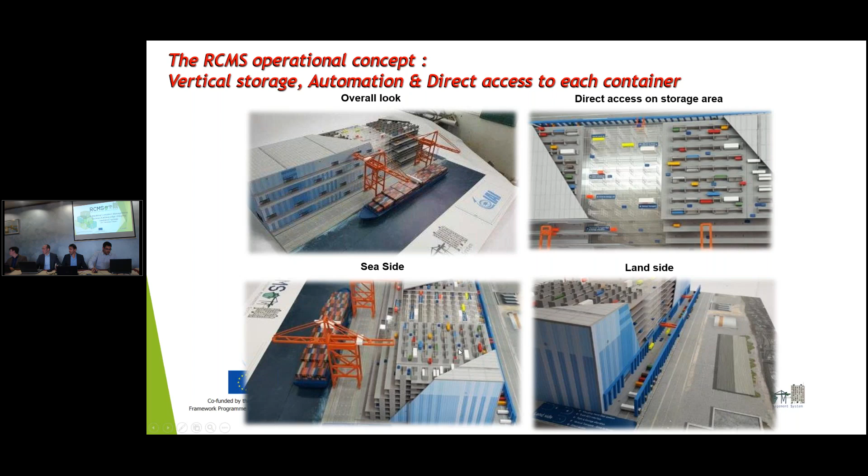From the top view, you can see the general layout, which we will dive into in more detail later on. We differentiate between the sea side on the left and the land side on the right, and in the middle there is the storage. So we have three main elements, and we'll now dive into more details on each one: the interface with the sea, the storage inside the infrastructure, and the interface with the land side.

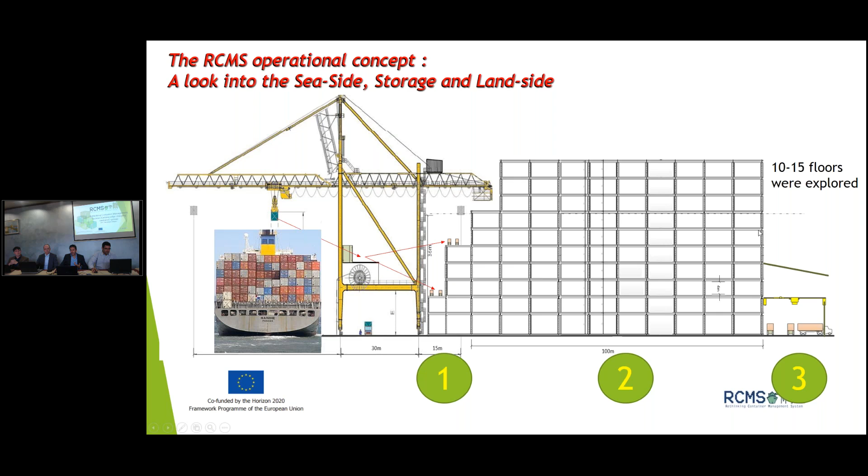This sketch is already after some design by our partner Sellhorn, who will get into more details during his presentation. So the first part is the interface with the sea side.

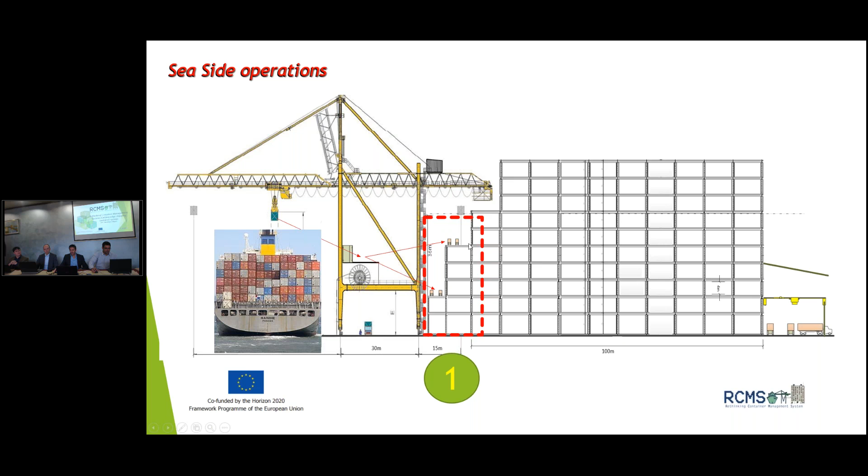That's where we release the twist locks before we put the containers on the balconies, which are outreaching from the building. We have a few balconies, you can see here.

The AGV, which was designed during the project by us, is a unique AGV with omnidirectional capability.

The AGVs are controlled by central software which manages all of the resources in the building, getting its missions and knowing exactly to which balcony to drive and under which STS crane to wait. Under the crane, we have a circular queue in order to maintain the right order when uploading containers into the ship. When downloading containers, it doesn't really matter which AGV arrives first.

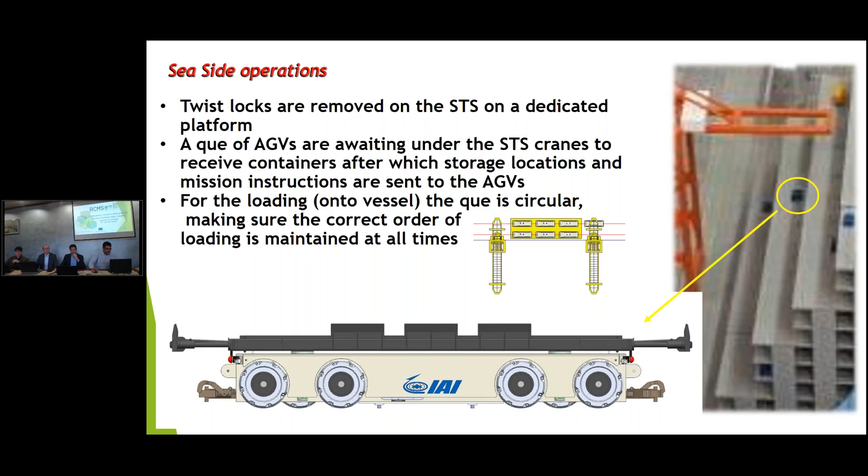We'll get into more details about the AGV later on as part of the discussion of the storage. This is the next element.

The storage provides—we'll see some key performance from HPC later on—but in general, we are able to have many more containers per hectare than any other current technology. We can have storage 10 floors high, 12, 15. It's very site dependent and according to the requirements of the specific terminal.

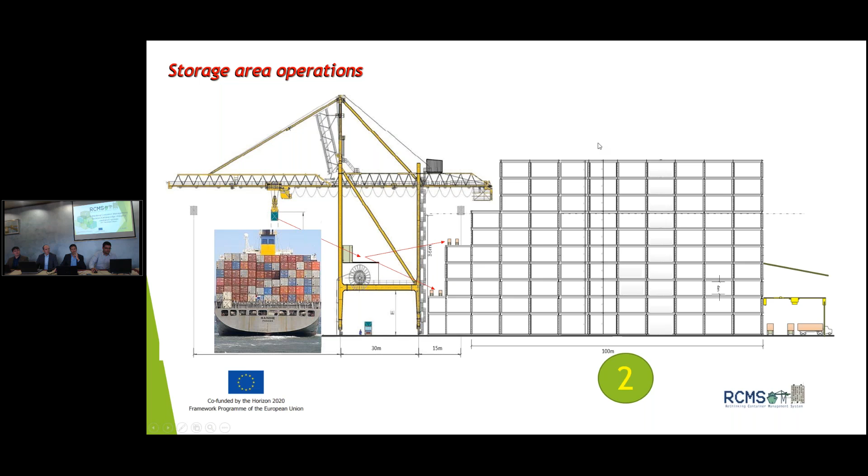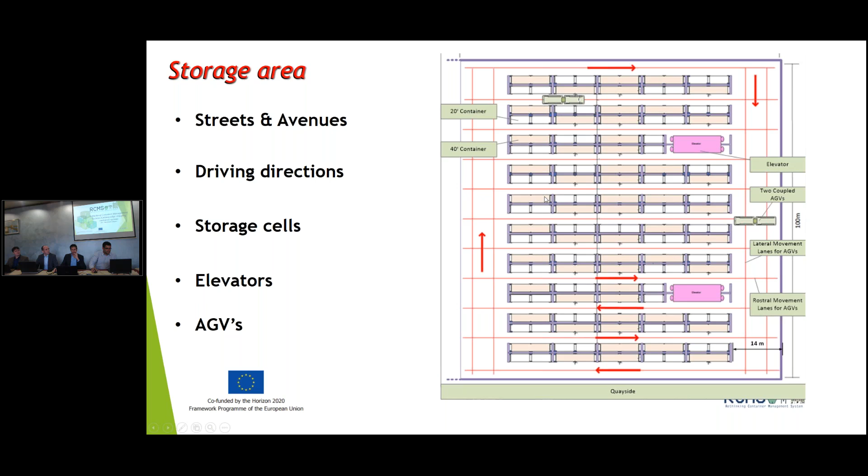Inside the storage, this is the top view of a typical floor. We have streets driving from side to side in parallel to the quay, and avenues driving perpendicular to the quay, between the sea side and the land side. Driving direction, storage cells—those are the storage cells. We have elevators and AGVs.

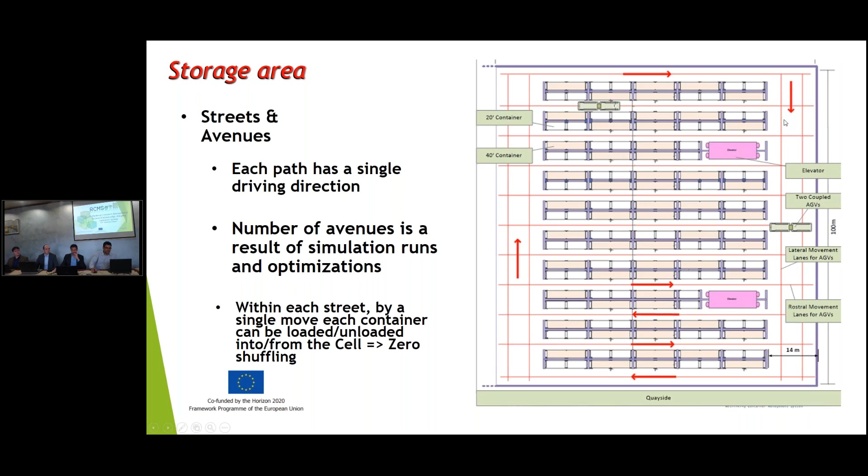In each avenue and each street, for robustness, we have a single direction in which any of the AGVs can drive. This makes it very robust operationally, and the number of avenues, how many free lanes we have, is an output of the simulation run by HPC. That dictates the density of the entire building.

The storage cell is very unique—this is the storage cell. In each storage cell, we can store either two 20-foot containers or a single 40-foot container. The containers are stored like floating in the air, enabling the unique AGV to get under the container and fetch it in one step.

This enables us to have zero shuffling, because while driving in the street, with a single move we get into the cell and fetch a container. So this is actually zero shuffling.

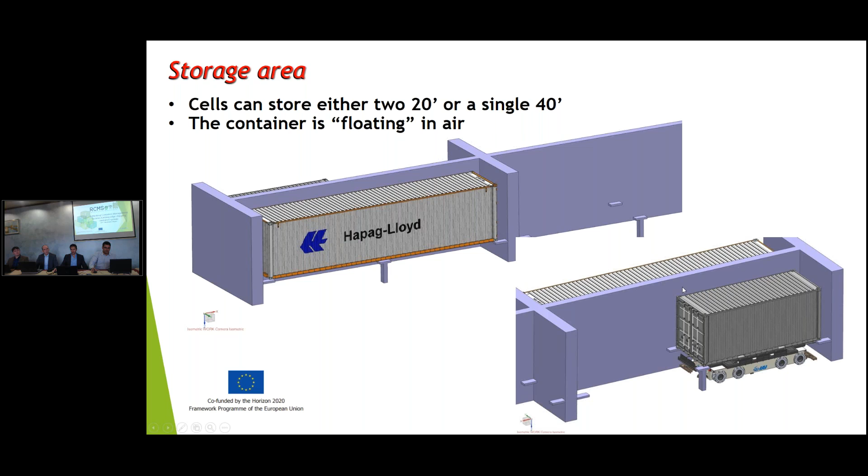The next item is the AGVs. Those are two AGVs being coupled together—it looks like that. We have a coupling mechanism, and it doesn't matter from which direction the other AGV is arriving. It can be coupled from either direction or from any side of the AGV.

The AGV has a lifting platform, and on top of the lifting platform, the container is dropped under the STS crane or picked up while taking it from the cell. We have a very good design which enables us to work 8 hours continuously with only 2 hours of charging. It is a completely electric vehicle.

It is smaller than a container, and using the special omni wheels, we can drive in any direction, which is very important to enable us to work in the specific layout you saw before—there is zero radius needed for maneuverability, unlike today's vehicles.

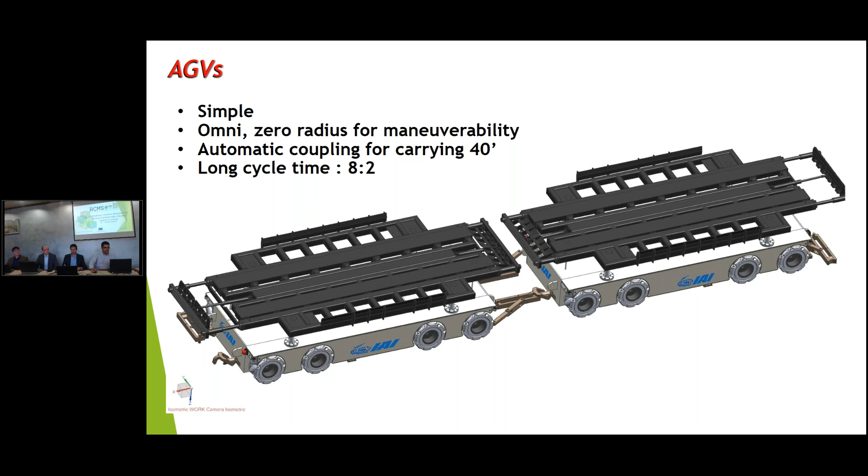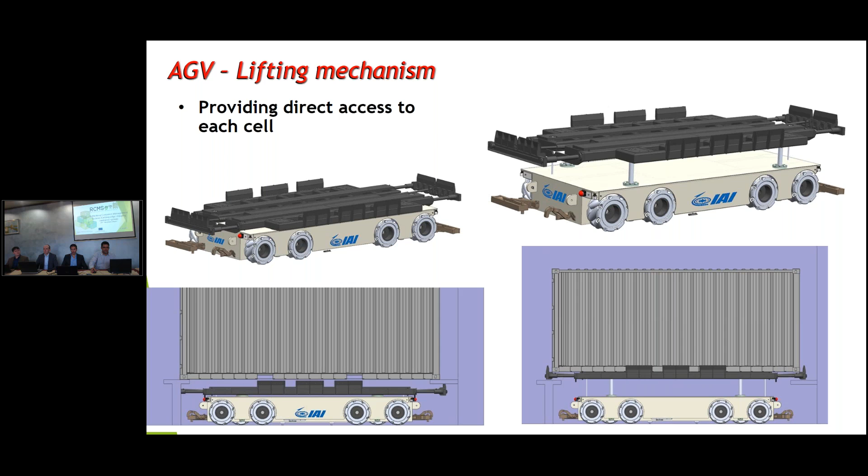How it works: this is the AGV inside the cell. Currently, the lifting platform is in the lower position, and then it is raised upwards, as you see here. While getting upright, it is actually taking the container, and then the AGV can get out of the cell and drive to the STS or to the waiting trucks on the bottom floor.

Comparing with today's traditional AGVs, our AGV is much more compact, of course lower cost because of that, and lighter in weight. Also, for horizontal transport, it has its benefits because of the zero-radius maneuverability—we can have horizontal transport over a much shorter distance, with the width much smaller than today's horizontal transport areas where AGVs are used.

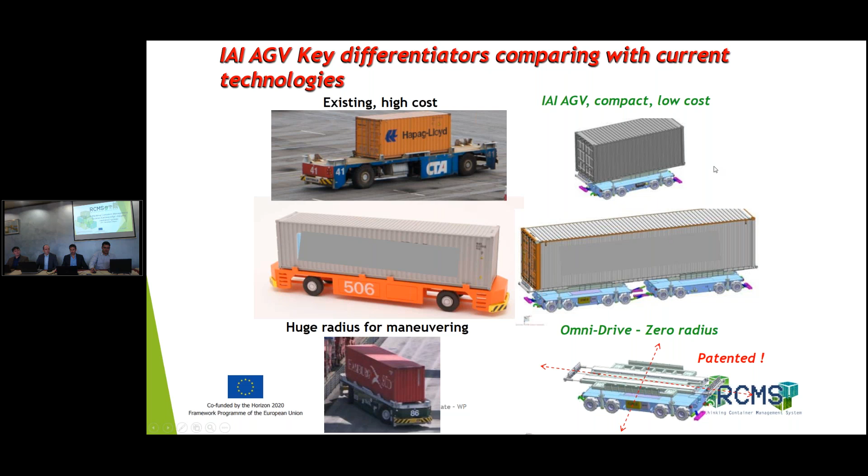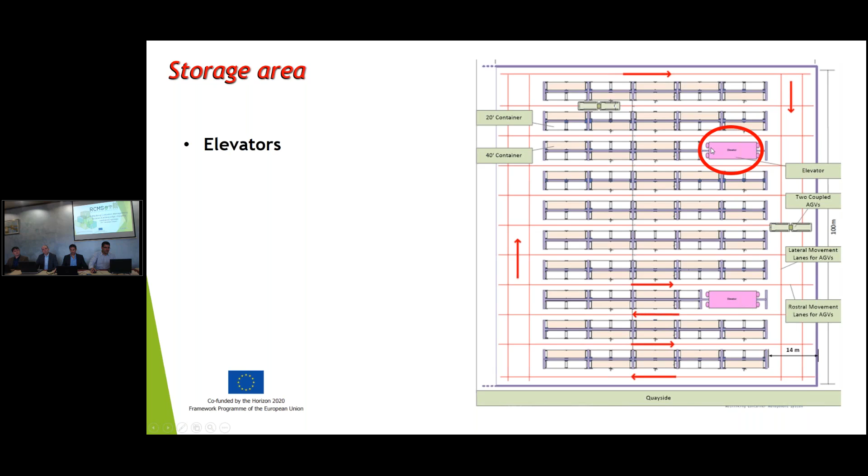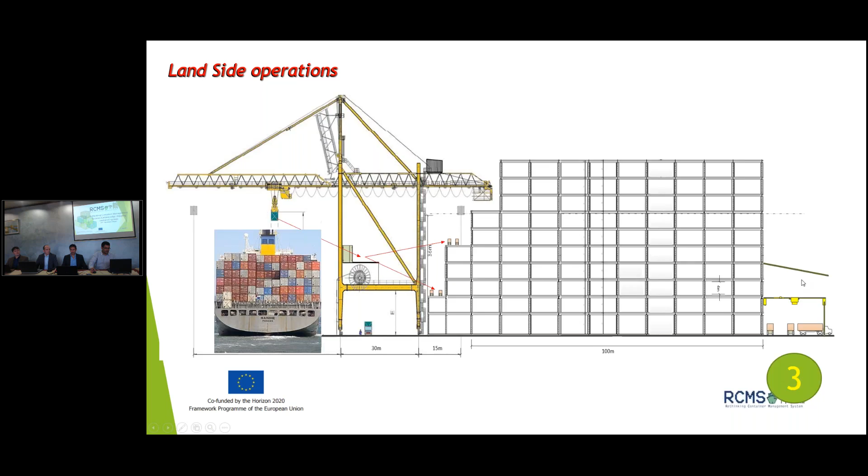The simulation optimized the working of each OHBC, overhead bridge crane. The AGV gets out of the building, goes to the right place, to the right slot, and the OHBC takes the container to or from the truck and from the AGV. Then the AGV continues its mission, storing the container inside the building using the elevators to move between floors.

So what we saw here in brief is a top view and an overview of the operational concept of the RCMS, with discussion on three main areas: the interface with the sea side, the storage with the unique AGVs we developed, which is very unique for this project, and the interface with the land side.

The project provides space utilization much better than any current technology. It is modular, meaning you can build the building in steps — you don't need to build the entire infrastructure along the entire quay from day one — and it's very robust against potential errors. Right now, Israel Aerospace Industries is looking for places and partners to start working on a pilot.

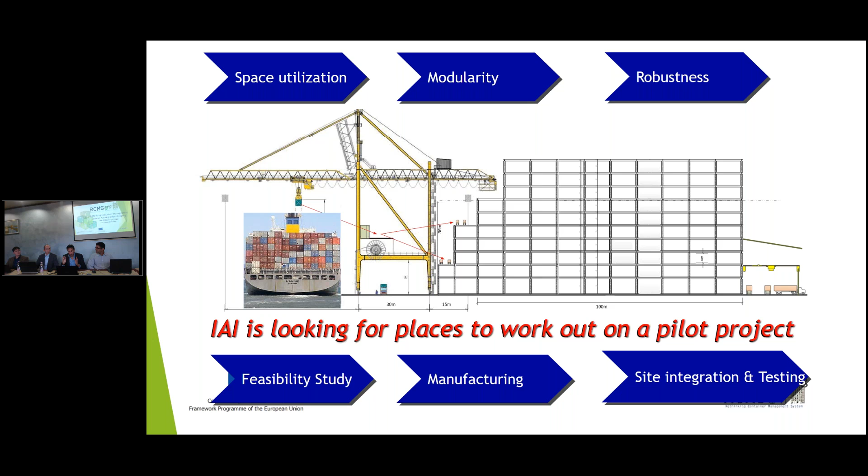Actually, we don't have any questions, but they may come. So thanks Anand for the presentation and for the time. Now the floor is for Niels. Niels came from HPC Hamburg Port Consulting. The presentation from Niels will be about one of the main aims of the project I was mentioning before, comparing and assessing the performance of RCMS with other state-of-the-art technologies in handling containers in terminals. So Niels, the floor is yours.

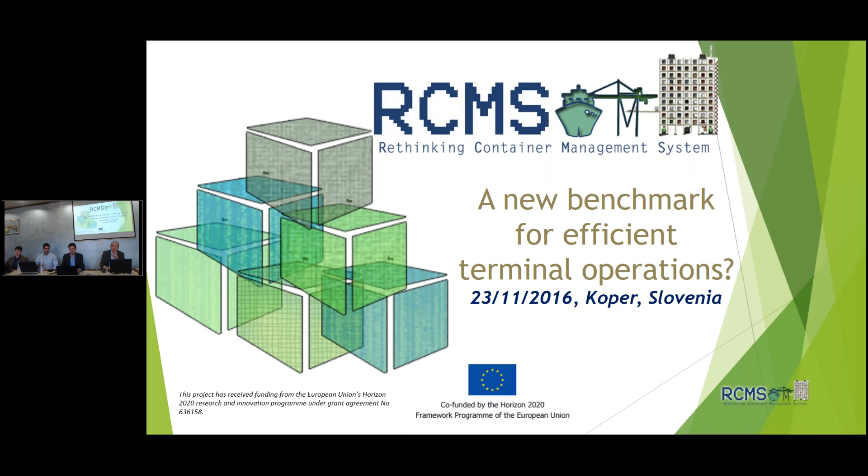Thank you, Alexio, for the introduction. As you said, following the technological introduction of the system, presenting its functionality and basic concept, I would like to address the question of whether the RCMS system as planned is actually feasible, and whether it can achieve better performance than existing systems. So the question is: is it a new benchmark for efficient terminal operations?

In principle, the RCMS, as presented by Hanan, sounds like a very interesting solution. It offers improved stacking density and area utilization, as he highlighted. It does not require unproductive container rehandling — shuffle moves or housekeeping moves — which are usually required whenever you stack containers. It also enables full automation of the system, and shall enable competitive productivity and service levels for landside and waterside operations. It will also reduce emissions — not just exhaust emissions as Hanan mentioned, but also light and noise emissions, since operations mostly take place within a building — and at the same time improve work safety.

But the question we will address in this presentation is: does it actually work as planned? Which productivity levels, which area savings can we achieve, how much additional throughput, and ultimately how much equipment is required to achieve these gains in storage density? So ultimately, the question is whether the RCMS is better than state-of-the-art systems.

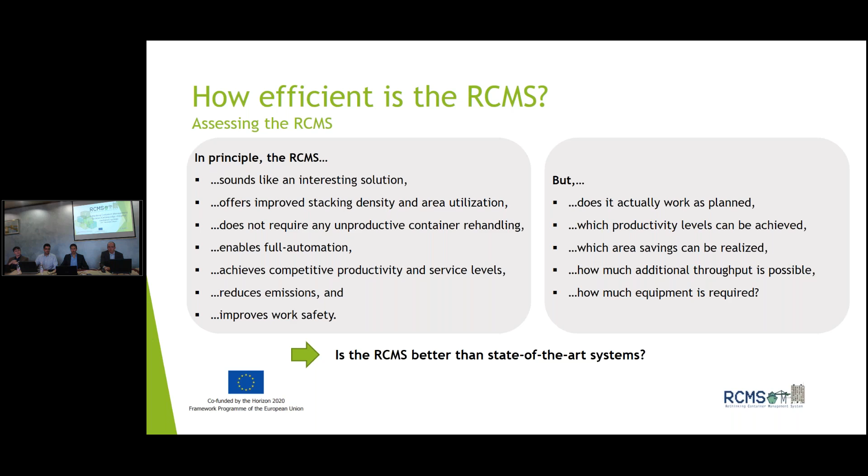This brings me to two important questions. First, what does a better system actually mean? There are several ways to assess container terminal and container handling technology — you can evaluate them on several criteria and dimensions. Noteworthy are costs, investment costs, operating costs, and environmental considerations like noise and exhaust emissions. But most important of all, the baseline for any system, is operational performance. And for operational performance too, there are several different criteria that have to be taken into account.

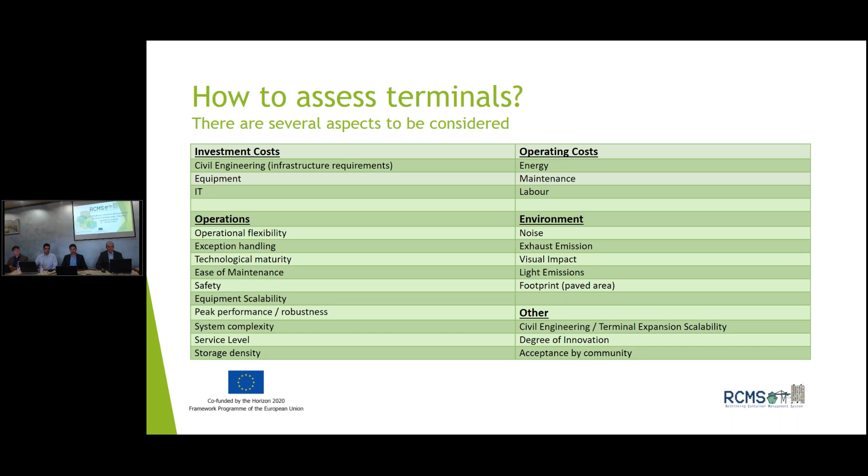From our experience at HPC, I think the most noteworthy metrics are the service level and the storage density. The service level is the productivity that can be realized at the water side when working on the vessel, and at the land side when serving trucks and trains. Storage density refers to the throughput that can be achieved per area on the terminal.

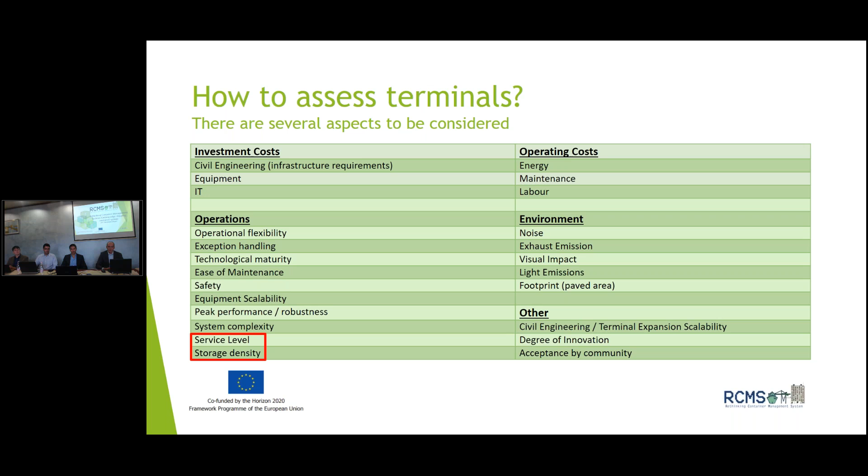The other question is, what are the competitor systems with which we have to compete and outperform in some aspects? For me, the state-of-the-art systems are, on one hand, the conventional RTG system, meaning fully manual rubber-tired gantry cranes, which is the most common system on relevantly sized terminals around the world. The other state-of-the-art system is the ASC AGV system, which is also proven and in operation at several terminals around the world, and is fully automated.

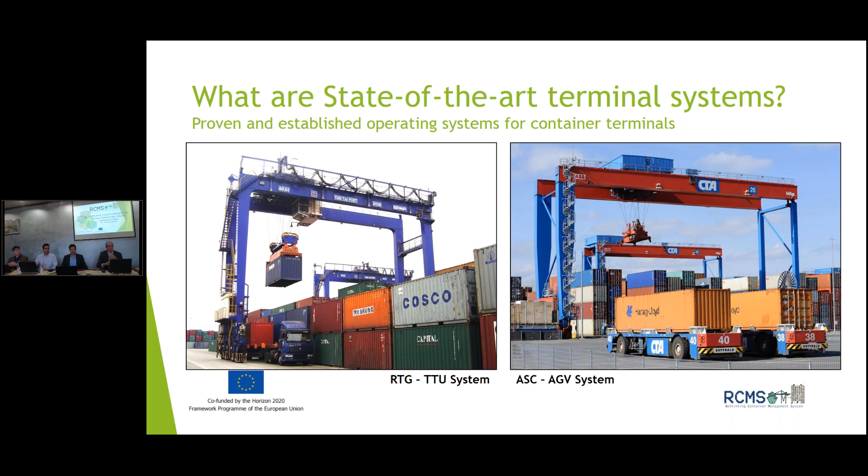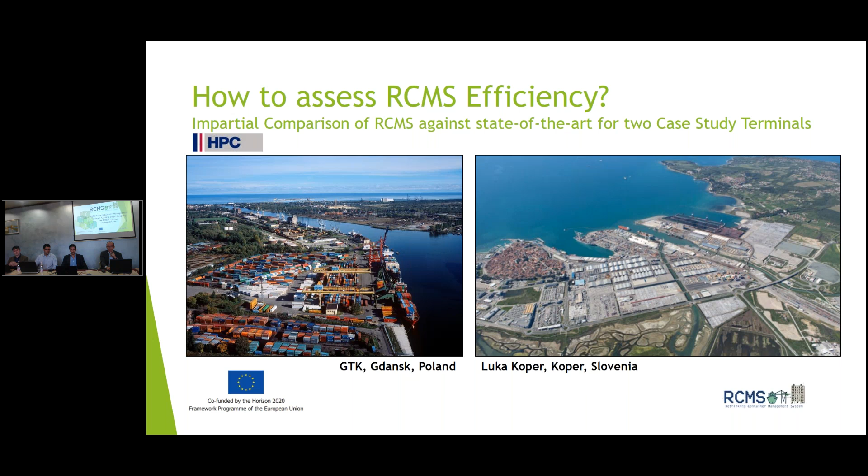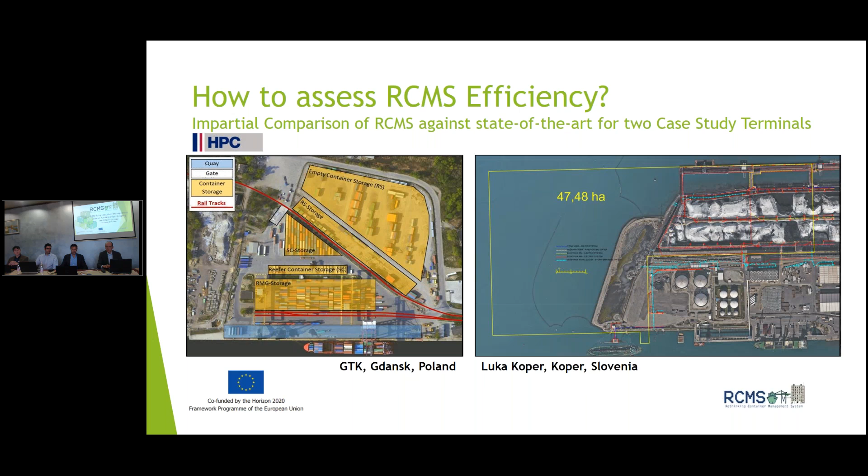The terminals differ in some aspects. The GTK in Poland is an existing facility, a very small-sized terminal, and the idea was, since we have a given footprint, to maximize the throughput for that footprint. For Koper, we were given an outer planning framework and a target capacity that had to be achieved by the system. The idea there was to minimize the area requirement for that target capacity.

Consequently, our idea was to develop alternative terminal designs with each of the three systems, namely a rubber-tired gantry crane, an automated stacking crane, and the new RCMS solution, for each of the two terminals.

Here you can see our initial plans for these solutions. In the top row are the solutions for Gdansk: first the RTG, then the ASC automated stacking crane solution, and finally the RCMS. In the lower row, we have the solutions for Koper, in pretty much the same order.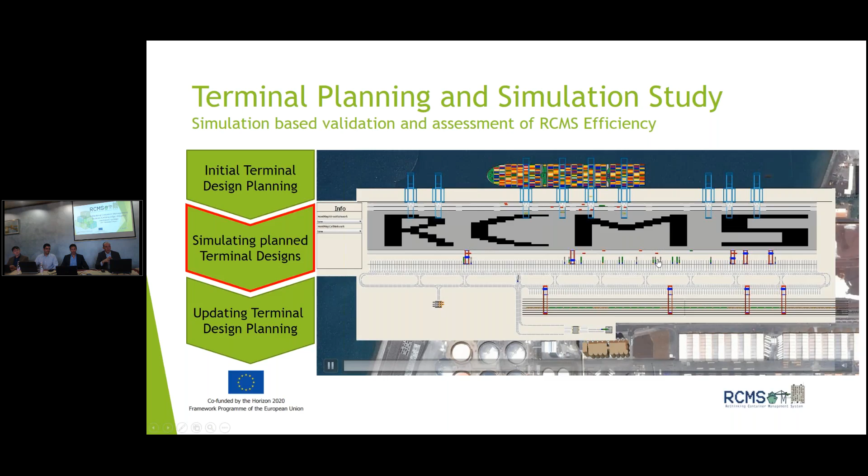We of course received a lot of information from the simulation. For all 6 designs that we analyzed, we were mostly interested in the results for the RCMS, since we had no experience with that kind of system, and we were curious what productivity levels could be achieved by it.

On this slide, you can see the productivity levels of the RCMS equipment itself, meaning the AGVs, the elevators, and the overhead bridge cranes at the land side. In addition, we see probably the most important terminal performance indicator, the ship-to-shore crane productivity, shown here in the upper left. This graph shows the productivity variation, the blue line, over the course of a week, and the red line shows the average productivity achieved. Here you can see that we were able to achieve a target productivity of 30 moves per hour.

Theoretically, we can also achieve higher productivities with the RCMS, but we were essentially targeting a productivity of 30 moves for all of the systems that we compared, in order to compare apples with apples in the end.

But with adding more equipment, you could achieve higher productivities with the RCMS. Additionally, there is a kind of corridor in the productivity at the ship-to-shore cranes, essentially between 25 and 35 moves per hour, which is comparable and stable when compared to other systems, mainly manual systems like the RTG system. For these systems, you usually see much higher variation in the productivity at the ship-to-shore cranes, whereas the RCMS produces a very stable waterside productivity, which is usually preferred by terminals since it creates a very plannable environment.

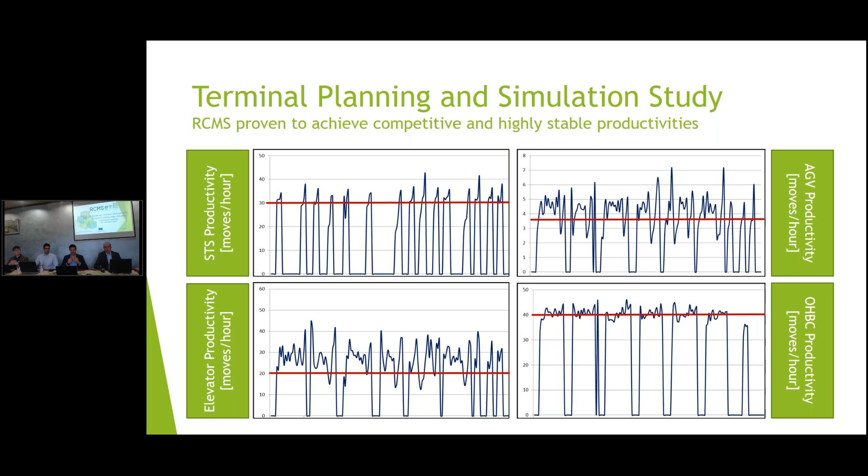On the lower picture, you can see the elevator productivity. Elevators are able to do some 20 productive lifts per hour, and the OHBCs are really extraordinarily productive, able to do some 40 loading and unloading moves per hour.

Using this new information from the simulation, we updated our initial terminal design plans and determined the final equipment requirements for all systems compared here, summarized in this table. Here you can see the three systems compared: RTG, ASC, RCMS, and the different equipment needed in both columns for GTK and Koper. For example, for Koper, we would need 44 RTGs and 95 TTUs for that system.

Looking at the RCMS, for the 10-high RCMS building, we would need 6 elevators, 2 OHBCs, and 45 AGVs, all to achieve a target productivity at the waterside of 30 moves per hour. When increasing the stacking height to 15 high, which boosts capacity in parallel, we would just need 1 additional elevator. The OHBCs already provide sufficient handling capacity, and we would need some additional AGVs to handle that extra capacity.

Besides these numerical results, the simulation also confirmed or revealed some other findings worth mentioning. First, since the RCMS has never been tested before, this detailed simulation, which really simulates all the processes and algorithms in detail, confirmed that the system is actually feasible. It's doable as planned. The processes and algorithms already provide very promising productivities, which can achieve competitive service levels at the waterside and landside.

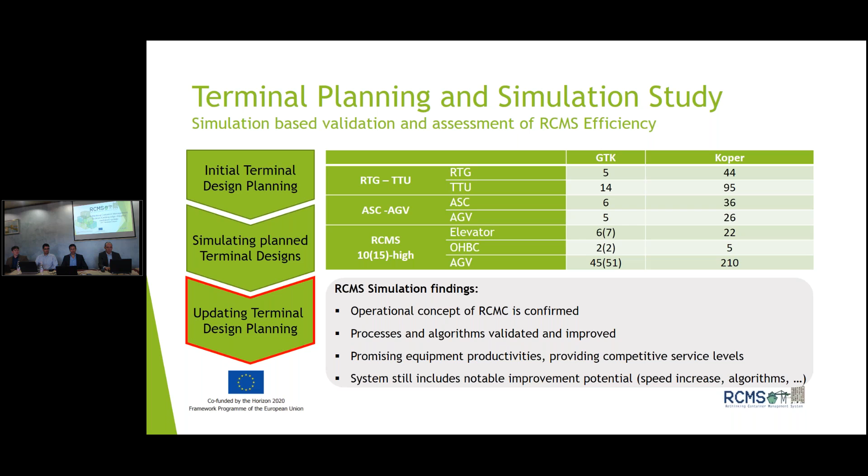Finally, looking at some KPIs for the systems compared here. First, the results for the terminal in Gdansk, the GTK terminal. As said before, our objective was to maximize the capacity for a given footprint of the terminal. As you can see in the first line, here are the productivities measured in TEU that we are able to achieve with the systems. The RCMS, particularly the 15-high building, outperforms the other systems in terms of capacity, providing more than 100% higher capacity than the other automated solution, the ASC system.

This is also confirmed by another KPI, the storage density, measured as TEU slots per hectare. Here, the RCMS 15-high produces almost 4 times higher density than the existing ASC AGV solution. Another impressive KPI, considering salaries and personnel costs, is the annual throughput per staff, TEU per employee. Here, the RCMS building is again able to achieve more than 100% better levels than the ASC or even the RTG solution is able to achieve.

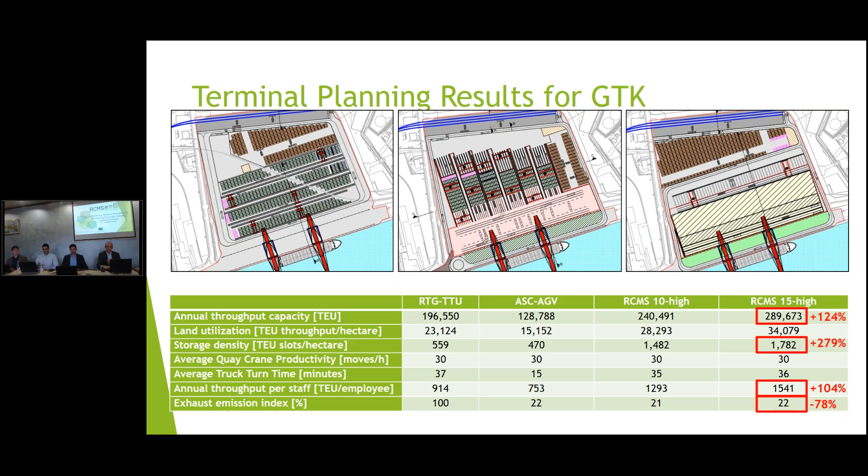For Koper, the results are very much the same, just on another level of capacity since the terminal is much bigger. Here again we have a 12-high RCMS, and this system is also able to outperform the other systems. In this case, it provides almost 100% higher storage density than the RTG solutions. It again provides the best ratio in terms of TEU per employee, more than 100% better than the RTG and conventional solutions, and it is also best with regards to exhaust emissions.

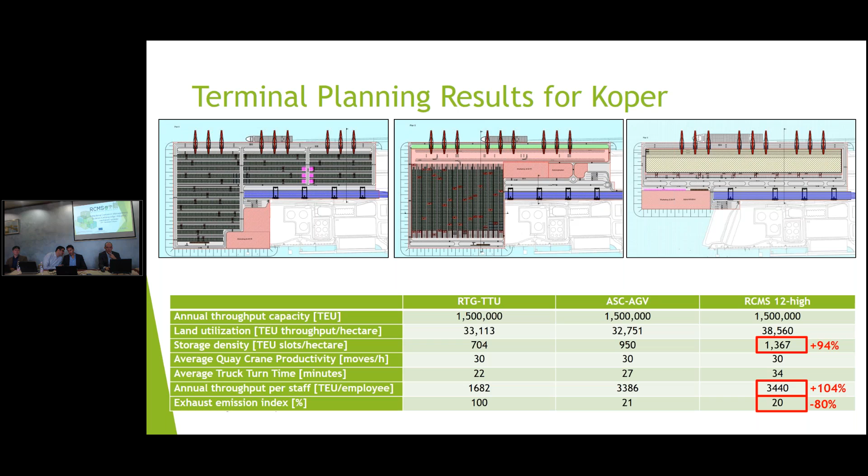So, in summary, our analysis from HPC revealed that the RCMS is feasible as it has been planned before. The control algorithms already lead to very efficient resource utilization, so we are able to achieve competitive service quality for vessels, trains, and trucks all at the same time.

And most noteworthy of all is the fact that RCMS achieves unrivaled storage density. There is no system available in the market which can compete with the RCMS with regards to storage density.

So consequently, when looking at which field of application or which type of terminal the RCMS is particularly suited for, we could say: whenever you have a terminal or a port that wants to boost its capacity, when you are restricted in space, when you have limited possibility for reclamation, when you have high labor costs, and when there is a certain level of environmental awareness in your place, then I think there is no other solution than the RCMS.

The RCMS is then the ultimate solution to boost your terminal capacity. Thank you, that's it from my side. Happy to receive any questions.

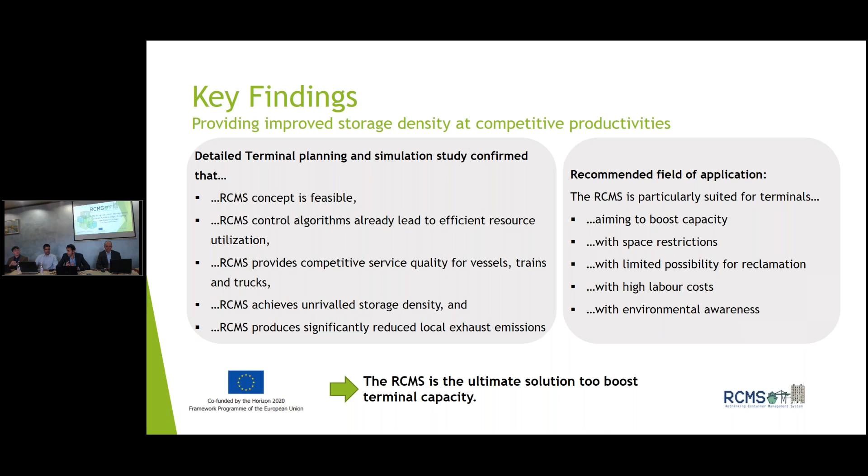In the meantime, we have received the first question that I think Anand could answer. It's about the operational concept of the RCMS, specifically how the containers are moved from RCMS to trucks, and which possibilities we have in the last part of the exchange between RCMS and trucks.

Okay, maybe here Niels will bring the right slide. You can put up a slide where we see the OHBCs. So we have a few OHBCs, as you see now on the screen. This is a top view. The OHBC has the capability to turn, to rotate the container. So we have a few OHBCs moving along the building on the bottom floor, as you can also see in the picture on the right. The AGVs park perpendicular to the truck.

The OHBC takes the container from the AGV, turns it, and puts it on the truck, and vice versa from the truck, turns it, and puts it on the AGV—exactly like the STS operator puts the container on the AGV. And as you saw in the drawing of the AGV, it's actually from a CAD file, not a Photoshop image, so it's coming from a very detailed CAD file. Then you have those guides enabling the container to be put on the AGV.

As for the other aspect of energy, we'll answer that after Sellhorn's presentation. So I hope I managed to answer this question.

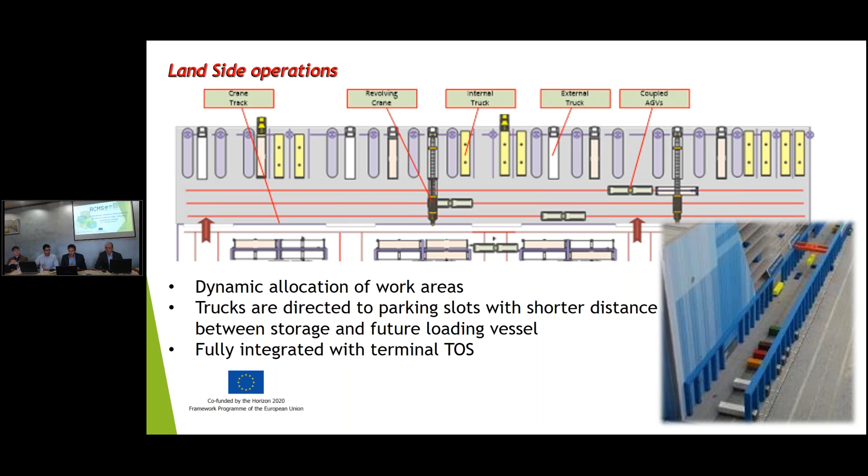So we go to the last presentation. As you may imagine, building an RCMS is not the easiest part of the game, and there are specific things that have to be studied and researched. This is exactly the aim of one of our partners in the consortium, Sellhorn, and Norbert Pett from Sellhorn will elaborate on how to build the RCMS from the civil work and optimization point of view. Norbert, the floor is yours.

So, hello also from my side.

I like to spend a few words to get a certain understanding of what it means from the technical side to implement the RCMS, and what do we understand as the RCMS. We have heard about the operational system now from Niels and Hanan, so now I like to give you a certain understanding of what the RCMS means.

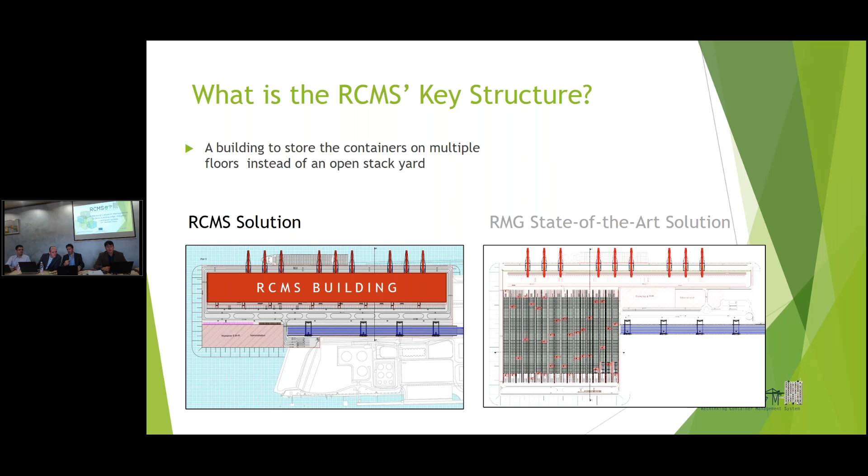So what is the RCMS key structure? This is basically a building to store the containers on multiple floors instead of an open stackyard. You can see on the right picture below the open yard solution, as an example, from the RMG system. And on the left picture, highlighted, for example, the RCMS building as a structure. So from a top view along the quay wall, to have a better understanding, the cross section shows you basically

the building itself. So what are the requirements which we have to consider for the technical planning? The requirements came from the operational demand. This means we have to consider the driving of AGVs inside the building on all floors, the direct accessibility of the AGVs to each container so no shuffling was required, and one container high at each floor, so we are not putting one container on top of another. So we have moving AGVs in operational mode from one floor to the other - this is where we have the elevators for.

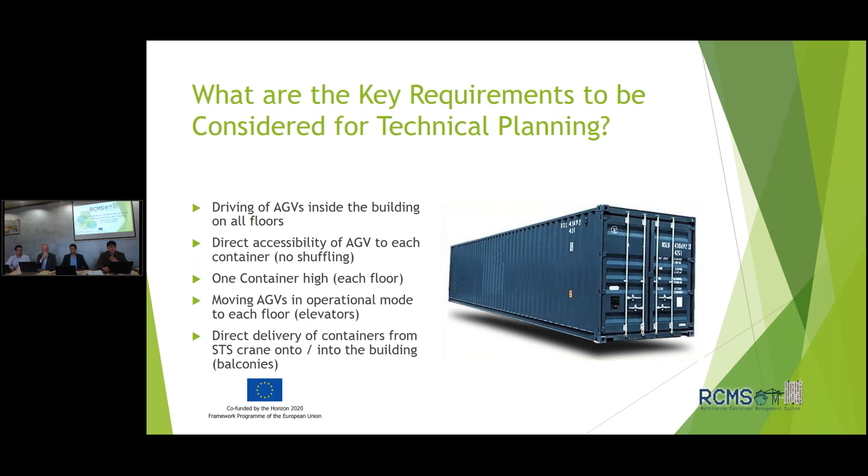And we consider the direct delivery of containers from the STS crane onto the building, via the balconies which have been introduced. So based on this, we have to consider certain requirements to the structure.

So what does it mean for the structure itself? That means we have high traffic loads coming from the AGVs carrying full containers, which is considerable load for such a building. We have, in addition, high loads for the accumulated containers stored within the building. Then we have specific requirements on the inclination and flatness from AGV's omega wheels.

Also, and this is one of the main challenges, we need to consider the spacing between the supporting elements, whether columns or walls. We need to allow that AGVs can move freely with a 40-foot container plus additional clearance to the sides. And we have considerable floor heights to allow the high cube containers plus the AGV chassis to be lifted within the building.

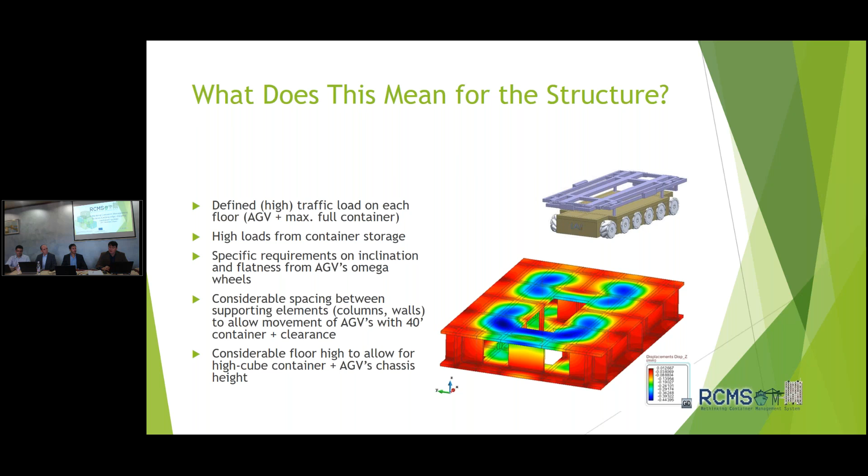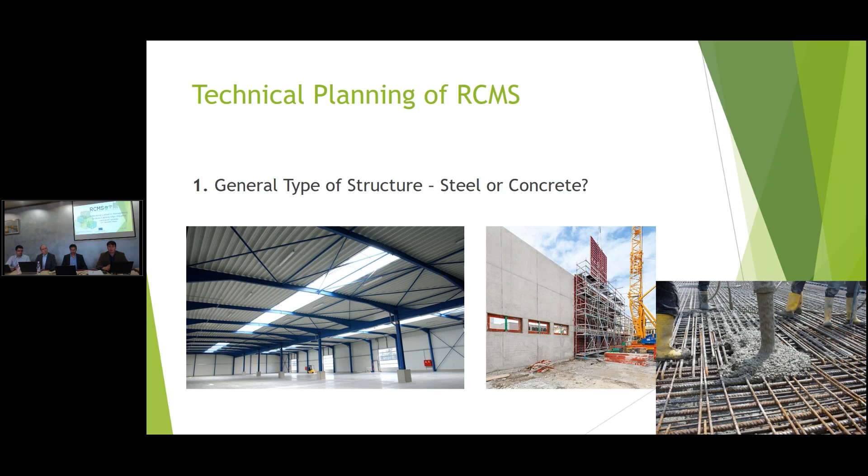So a few words on the technical planning of the RCMS. At the beginning there were preliminary design discussions and issues in terms of what would be feasible in terms of structure - possible structures like a steel structure were considered, and also concrete structure. We came to the conclusion that the concrete structure is more feasible than steel in order to allow for the high loads. So there was an interactive and iterative process from the operational side and the technical planning side in order to come to certain layout solutions.

How could this look like, the internal of the building? We developed an initial layout with a load-bearing concept of columns, as is typical for high-rise buildings or office buildings. We came up with column diameters of 1.4 meters, and considering the number of column rows needed, we decided that the main disadvantage was the inefficient utilization of space, so this should be looked into with other solutions.

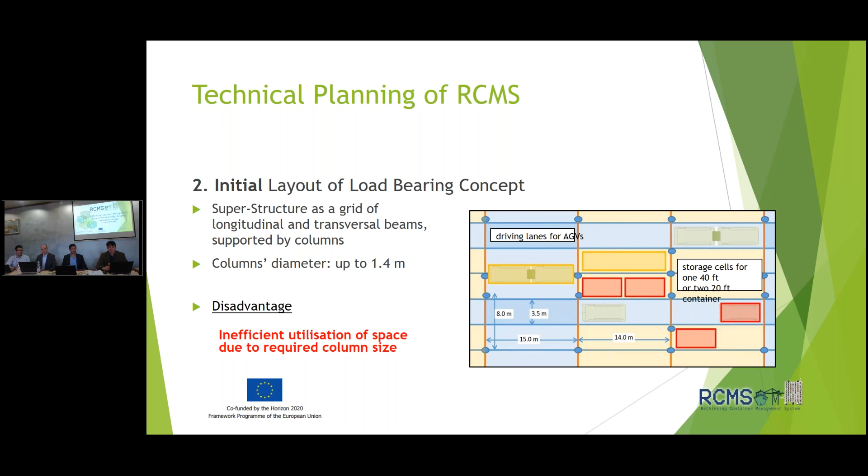So we came up with a more developed layout of load-bearing concept, introducing instead of columns, load-bearing reinforced concrete walls throughout the building. You can see on the right picture what you have seen before, what we call storage cells, but basically the walls around are the required structural elements for the building. The advantage is a more efficient utilization of space within the building, reducing the overall dimension of the building in horizontal dimensions. We also improve the redundancy of bearing members in terms of failure or damage to one of the bearing walls, so in total we have a more robust structure with a more even distribution of loads within the building.

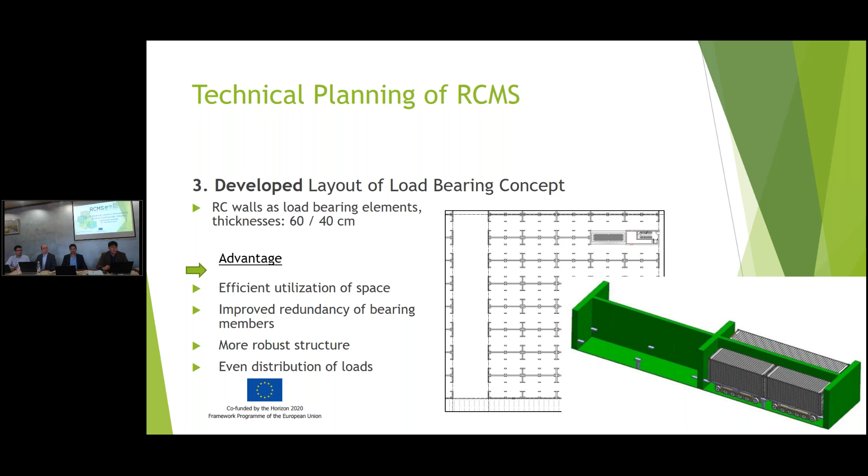So once having looked at the superstructure, the building itself and the live load, we needed, of course, to consider how the foundation of the building might look like. The substructure basically means transferring the high loads from the building into the subsoil. This proved to be, for the specific sites, a challenging approach.

At the end, both sites of Gdansk and Koper called for special deep foundation. We opted for poured concrete piles. But it needs to be mentioned that especially the foundation, which is also a cost driving factor, depends heavily on the present subsoil conditions - whether we have soft cohesive soils, sandy non-cohesive soils, or even rock. Therefore, the piles designed for these case studies could be either very short or even not existing at all, depending really on the site conditions.

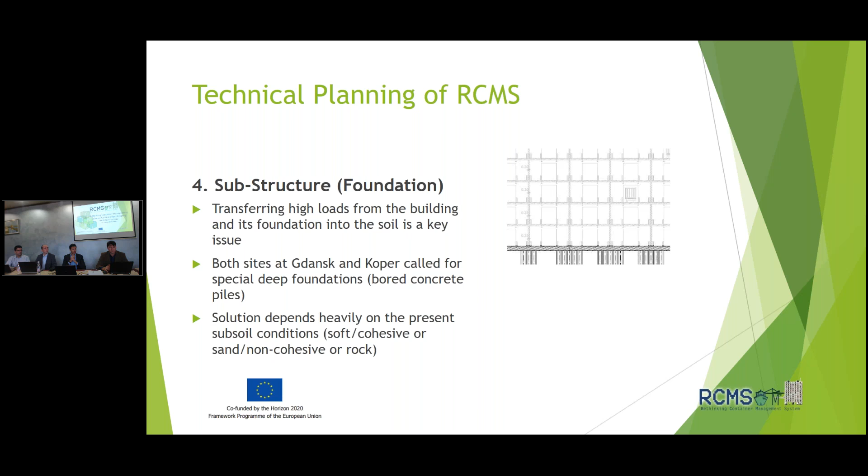I don't want to go into all the details because this would be too long for this webinar. Nevertheless, to mention it at least, a number of technical issues have been considered and discussed from operational needs and requirements. Just to mention a few of them.

The reefer container supply and access called for special solutions to separate the fully automated operation within the building from the reefer connections. The elevators, with a high carrying capacity of at least 70 tons, needed to be included into the concrete structure. The rainwater discharge proved to have considerable flow due to the large areas exposed to water. The firefighting concept within the building was lengthily discussed, and different solutions are possible.

Also, emergency and maintenance access was a technical issue - how to incorporate staircases or elevators for maintenance staff. In addition, illumination within the buildings, whether permanent or during maintenance, is required. Wi-Fi supply to the reinforced concrete structures needs special consideration. Power for charging points of the AGVs is a specific issue. And also, depending on where the site is located, keeping the balconies free from ice and snowy conditions to allow the omniwheels of the AGVs to drive. These are optional requirements, really depending on where the RCMS might be located.

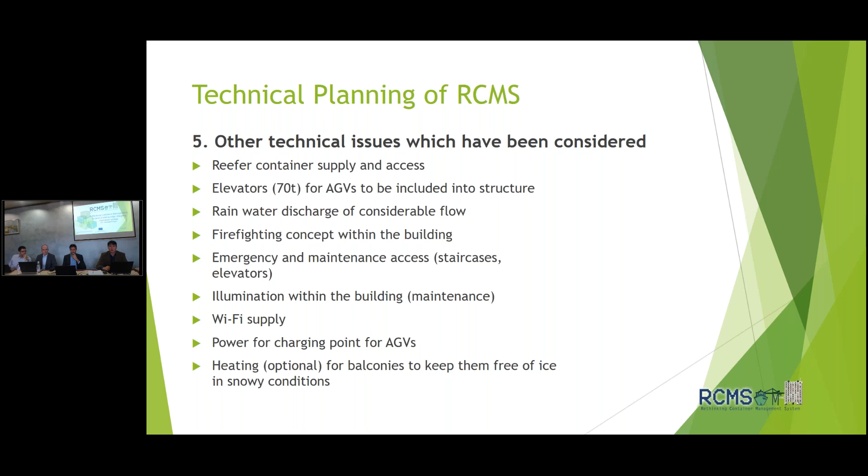During the process, many optimizations were done. In addition, we looked in a completely different direction, aside from a steel structure or concrete structure, introducing innovative materials where extensive calculations went on composite materials. We revised the roof construction to adapt it in a more cost-optimized way. Cost optimization was a main goal for all the design works, which needed to be performed based on detailed calculations in order to have a certain level of security of the structural feasibility.

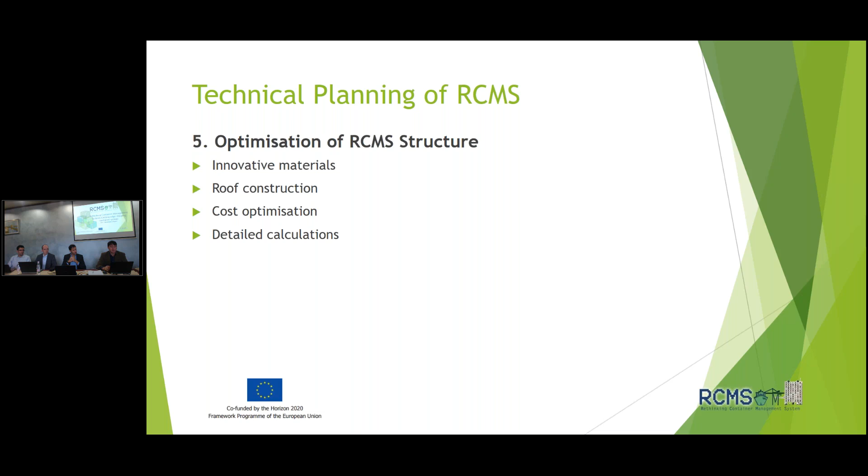So what was our final solution for this project? We came up that the heavy-duty reinforced concrete structure is the right solution, or the most economical one, based on bored piles. This proves that the RCMS is feasible from the technical point of view. We developed a concept which allows flexibility in the design height and also in horizontal dimensions, with modules we can adjust to actual requirements on demand. But nevertheless, there is not one solution which has been developed and can now be used for all sites. There are many site-dependent factors involved, which may lead to further improvements or even slightly different solutions.

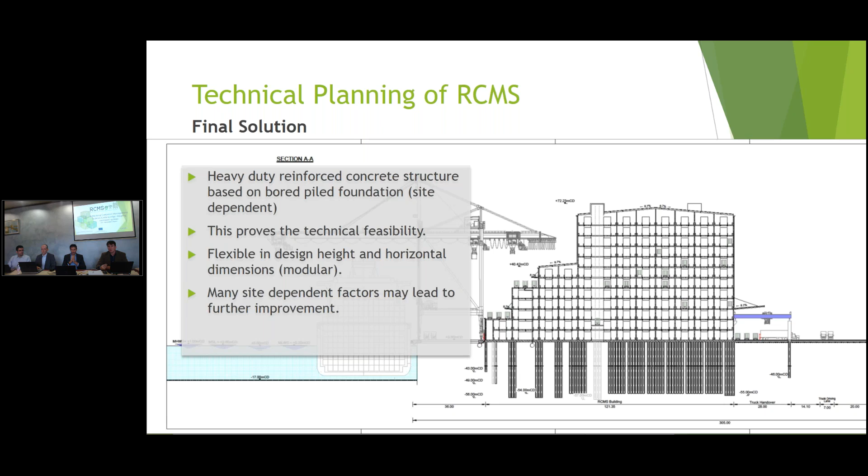So this is from my side. I'm not sure, Alexio, what questions? Yes, we have some questions. The first one is more related to the operational concept and the comparison - if we have some elaborations, or discussed specifically energy consumption. I think you are going to answer it.

Well, energy consumption - there are several drivers of energy consumption within the RCMS. On the one hand we have the AGVs, which are electrically powered and have to be charged. In addition, we have the elevators, which turned out to be a major driver of energy consumption within the building, since all AGVs and containers have to be lifted between floors, and we have the OHBCs. I don't have the exact numbers in mind because it differs per terminal and depends on the throughput volumes. But what I can say is that the total energy consumption is pretty much the same as we currently experience for traditional ASC AGV terminals. Essentially, the AGVs have to drive between different locations, and containers have to be lifted either by crane or by elevator, and in total it sums up to a very similar level of energy requirements.